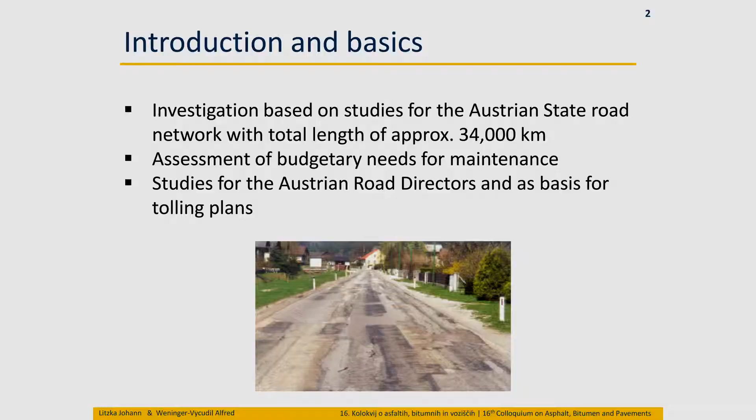Yesterday morning, we heard from the president of the EAPA that asphalt is not so sexy, at least from a political view. So that means road construction also is not very sexy, maybe. But I can tell you about something which is even less sexy than road construction in the view of the politicians. This is road maintenance. And this is the reason for several studies we did in the last years to have good arguments to convince politicians to provide more or at least enough money for pavement maintenance.

The first study, I think I had the opportunity also to, can we go to one picture only? It is on my, thank you.

Some years ago, 2 years ago, for the state road administrations, for the road directors, as a basis for tolling plans. There were plans to implement a tolling system, which is at the moment only on the motorway, perhaps on the state road network, at least for trucks. And to have a background about the needs of budget, this study was made, investigating the whole Austrian state road network.

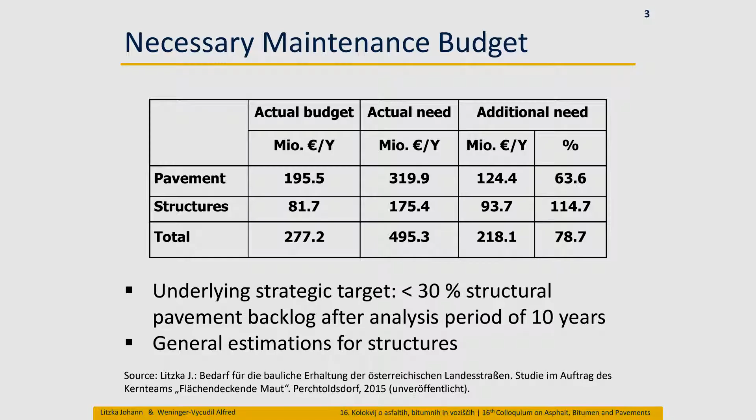You can see this was the result, just to show that quickly. For the pavement, you see the actual budget and the actual need according to the results of this study. And this here is the additional need. So you can see for the pavements, we found that there is an additional need of about 64%. For the structures, more than 100%. So in total, for the total network, about 80% would be the additional budgetary need to fulfill these underlying conditions.

We were calculating for a structural backlog of not more than 30% in the network. And I must also confess that for the structures, this was only a very, very rough estimation, because for bridges there are really good figures, but for retaining walls, and we have many retaining walls in the state road network, there is almost no or very little information. Not only on the inventory, this is the first point, but of course then on the condition and the need of maintenance. So this was the first outcome.

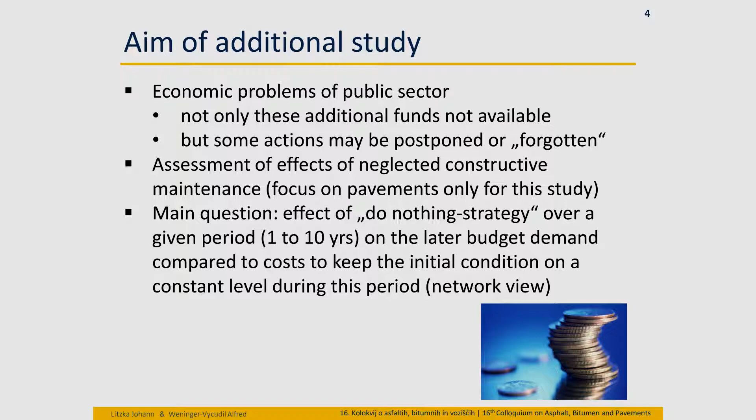And all of you know that, of course, there are always economic problems in the public sector. So the danger is not only that these additional funds are not available. This is a wish list. But on the other hand, it can be that some maintenance actions may be postponed or even forgotten at all. So the target of this additional study was to assess the effects of neglected constructive maintenance. In this time, we focused for the first stage on the pavement only.

And the main question of this study was, what is the effect of a do-nothing strategy over a given period on the later budget demand compared to the costs to keep the initial condition of the network on the same level. This was the strategy we used for this study, and it is interesting that the study was made for the Chamber of Employees in Austria, for the Department of Transportation Strategies or Transportation Politics. So also this side of the community is interested that there is a well-maintained transportation network.

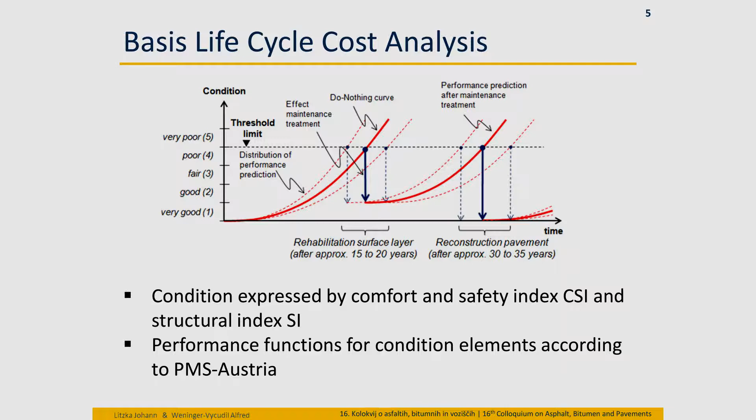We used for this study, of course, as was mentioned recently, also the life cycle cost analysis to provide the necessary measures when a certain threshold limit is reached or we come close to this limit. We have performance functions for these several condition elements in the pavement management system we use in Austria.

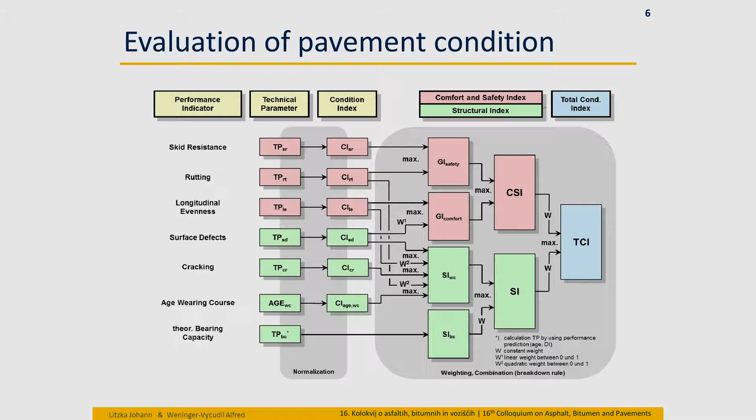But on the other hand, and I will come back to that later, these two sub-indices are also used to investigate certain targets. So, for instance, the Comfort and Safety Index is used to look at additional user costs, and the Structural Index, I will explain that in the next sheet, is used to evaluate the asset value. And the asset value was the point we used for the comparison in this study.

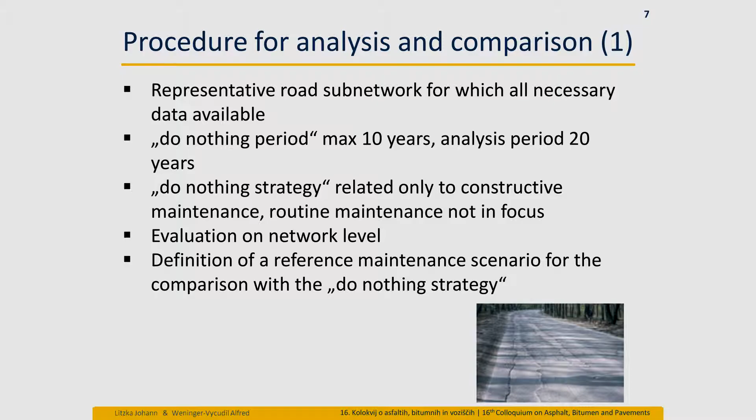So we chose a representative road sub-network of the Austrian State Road Network for which all necessary data were available. The do-nothing period was taken for a maximum of 10 years, while the analysis period, as always, is taken for 20 years. The do-nothing strategy was related only to the constructive maintenance. Routine maintenance is not in focus within this study. And this is very important.

Each evaluation, each result I'm going to show is on network level. Of course, during the analysis several sections are estimated and evaluated, but the results are valid for the whole network in view. And it was necessary to define a reference maintenance scenario for the comparison with this do-nothing strategy for several years.

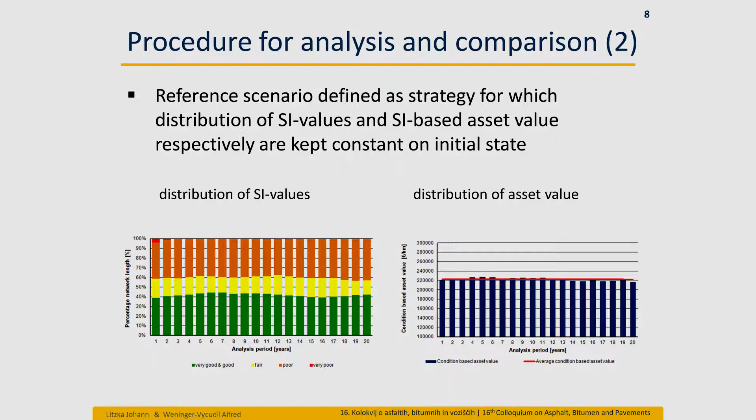The asset value we are calculating in relation to the actual structural index. So the value of the structure is the basis to calculate the asset value. We don't make a linear depreciation over time, but it is connected to the structural index. So you can see in this reference scenario, the asset value is kept constant over this period. This was the procedure and the way we conducted the study, and the first result you can see here.

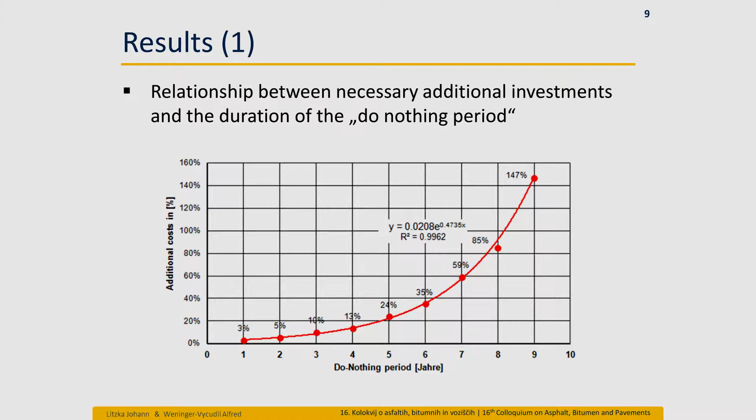You can see the relationship between the necessary additional investments and the duration of the do-nothing period. And you can see that already after a do-nothing period of, let me say, 5 years, you will have to invest up to 24 or 25% more compared to the budget you would need to keep this initial state. So you don't save something if you do nothing. On the contrary, you need more money. And this is increasing rapidly the longer this do-nothing period lasts.

And then there was the idea to look at the influence of the initial status of the network. If you have a poor or a better network, is there a difference? And for that reason, we divided the subnetwork under investigation into 2 subparts with 2 different initial values for the structural index. And there you can see the results.

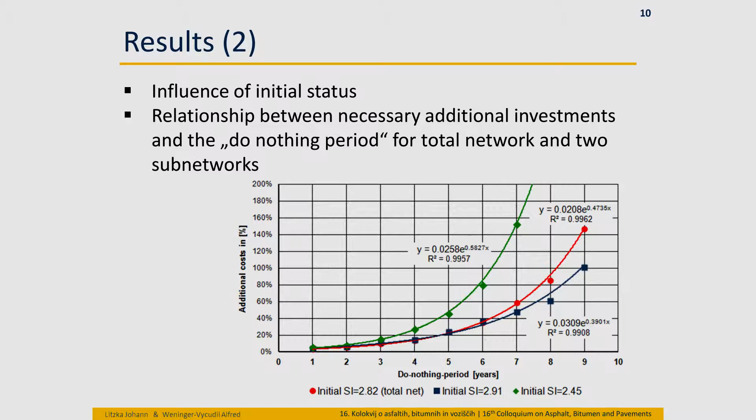This is the result. The red curve is for the total network, and this is the curve for the part of the network with a structural index a little better than the total, and this is the other one where the condition is worse. And from this, a general formula was developed so that we can now either calculate it directly with this formula, or you can see it here in this graph.

If you know the initial status based on the structural index of a given network, you can assess the necessary additional investments after a given period of do-nothing. So in this way, this result, which was developed for an Austrian state road network, could be used for each other network as long as you have the necessary input values.

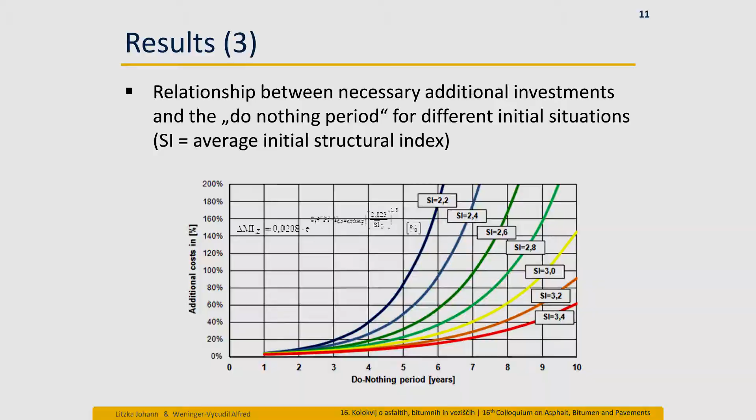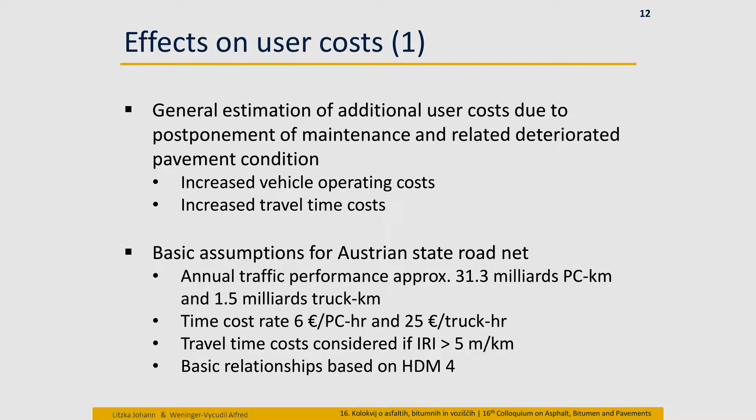This is the side of the road owner. This is necessary to show the road owner what additional investments are necessary if maintenance measures are postponed or neglected. Finally, in a very rough form, we were looking at the effects on user costs. We made a general estimation of the additional user costs due to the postponement for 2 reasons: the user cost caused by increased vehicle operating costs and increased travel time costs.

This was just to show that also the users are, in a way, confronted with these problems. We used the basic assumption for the Austrian state road network, derived from different sources. Time cost rates: we considered the additional travel time costs only if the IRI was higher than 5 meters per kilometer. This is a very, very rough surface you will never have on a motorway, for instance, but on a state road it can happen, or a community road in any case. And we used the basic relationship coming from HDM4 just for this overall assumption.

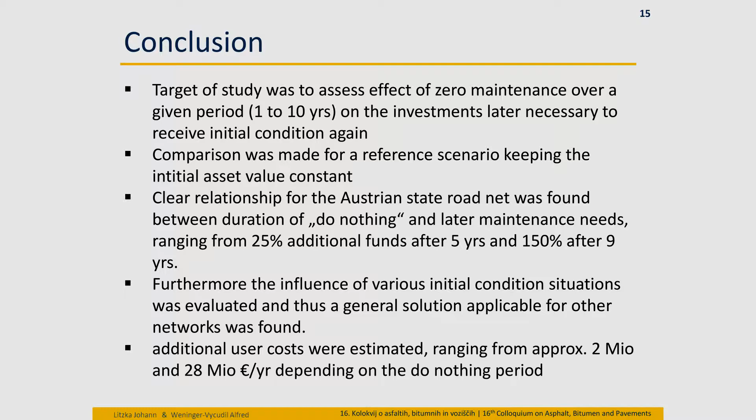And furthermore, the influence of the various initial conditions was evaluated, and thus the result is also a general solution which is applicable for other networks. And finally, additional user costs were estimated, ranging from approximately 2 million euro per year up to 28 million euro per year, depending on the do-nothing period. Especially these figures here are very drastic, I must confess. Of course, after 9 years, you tell them they have to spend 150% more money than they would have spent during the do-nothing period.

But on the other hand, I feel that it is necessary that we show these figures in a very drastic way. This is the only way the politicians can understand it. In the same way as you have these red roads on the map, which is easily understandable, it is similar here. You must show that it is necessary to have enough money, and I'm happy that yesterday evening some optimism came up, I think, for all the audience. I feel that now the political level also finds it necessary to have a well-maintained road network, and the readiness to provide the necessary funds is increasing. But it is still necessary to have good arguments, because we are always in competition with the other public sectors, and money is short in all the sectors.